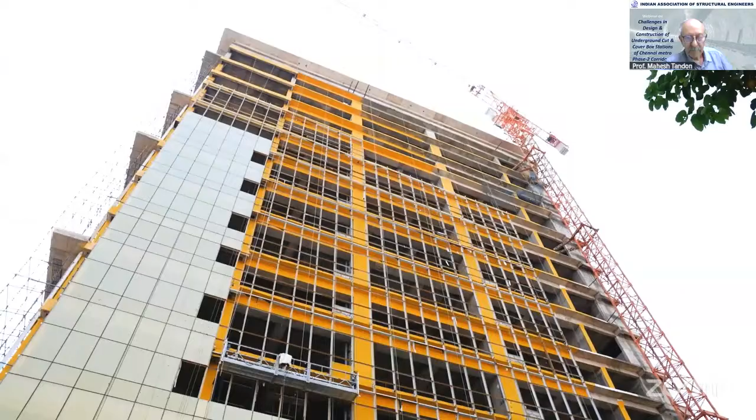The Indian Association of Structural Engineers, also known as IAStructE, was conceptualized and constituted in the year 2002 by a group of senior professional structural engineers from all over the country. IAStructE is registered under the Societies Registration Act 21 of 1860.

IAStructE is a national apex body of structural engineers in India with a mission to promote the structural engineering profession and cater to the professional needs of the structural fraternity. In the short span of two decades, the association has attained an eminent position in the professional field. Its membership is valued very highly in the profession.

Since inception, IAStructE has been led by eminent structural engineers like late Shri Mahendra Raj, late Shri Kumar Ghosh, Shri Subhash Chand Mehrotra, Professor Mahesh Tandon, Shri Alok Bhaumik, Shri Manoj Mittal, and Professor R. Pradeep Kumar as its president.

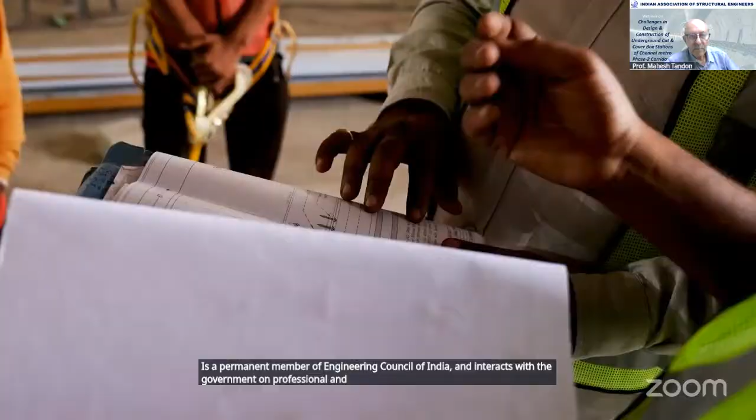IAStructE is a permanent member of the Engineering Council of India and interacts with the government on professional and policy matters related to civil and structural engineers. To expand its reach, IAStructE has collaborations with various international professional like-minded associations and institutions.

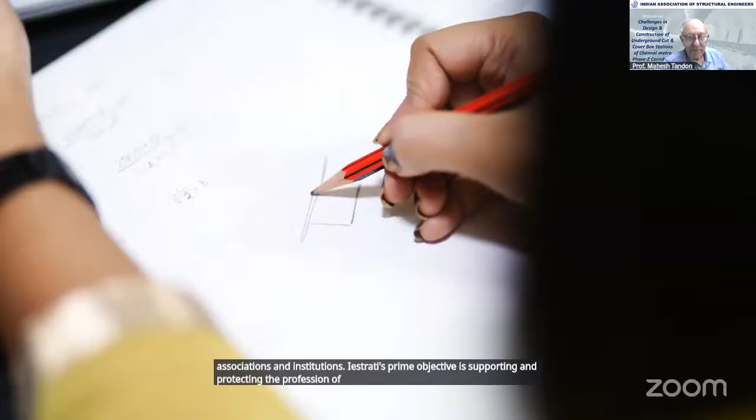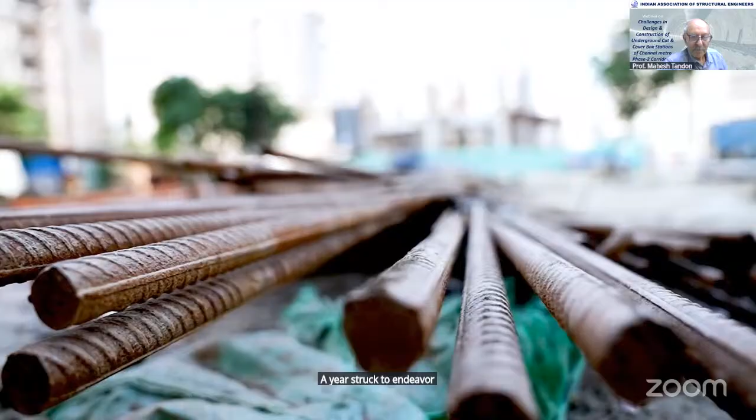IAStructE's prime objective is supporting and protecting the profession of structural engineering by upholding professional standards and acting as a mouthpiece for structural engineers in India. IAStructE endeavors to ensure that its members develop the necessary skills in structural engineering and work to the highest standards by maintaining a commitment to professional ethics and standards.

IAStructE is actively engaged in organizing several continuing professional development (CPD) courses for structural engineers to help them update their knowledge and advance their career paths. It also conducts refresher courses for young and practicing engineers and student-oriented programs.

Seminars, workshops, conferences, technical lectures and discussions related to the latest technological advancements and case studies are also organized regularly for members, enabling them to continuously update their knowledge and skill set by interacting with the best minds from the industry. IAStructE's activities are widely appreciated and known for quality technical content.

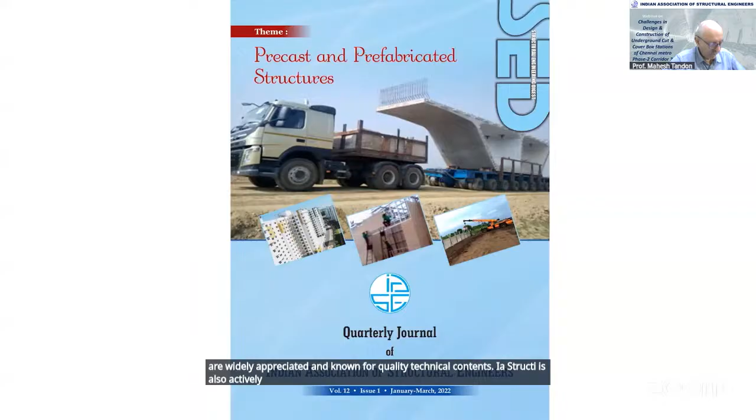IAStructE is also actively engaged in publishing its quarterly journal Structural Engineering Digest (SED), code commentaries, professional guidelines, and a monthly newsletter. IAStructE's publications are becoming popular with time.

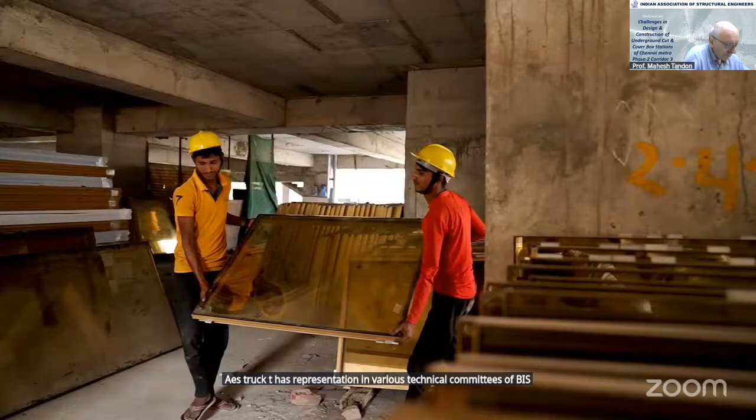IAStructE has representation in various technical committees of BIS and IRC as well. Its members are actively contributing to National Code Formulations.

In the year 2020, IAStructE started a National Awards competition to stimulate interest in the structural engineering field and to promote innovative thinking and creativity. The awards are presented to winners in recognition of their outstanding contribution to structural engineering in categories which include Outstanding Structure, Outstanding Structural Engineer, Outstanding Woman Structural Engineer, Promising Young Structural Engineer, and Best Master's Thesis in Structural Engineering.

IAStructE is currently operating from four regional centers, namely Eastern, Western, Northern, and Southern, with its headquarters in Delhi, to inculcate professional culture and provide handholding to budding engineers. IAStructE also has student chapters in several leading engineering institutions.

Membership of IAStructE is open to all civil and structural engineers engaged in the structural engineering profession. Members are elected based on their qualifications and experience in different grades as per eligibility requirements prescribed in the bylaws. Each application is carefully scrutinized before electing members.

More information about IAStructE is available on its website, www.iastructe.co.in.

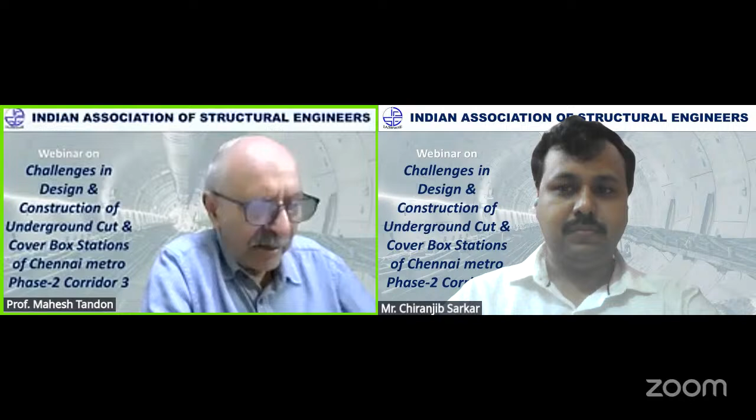He is postgraduate, with experience and planning for railway, road, and bridge projects, contributing to major tunnel works.

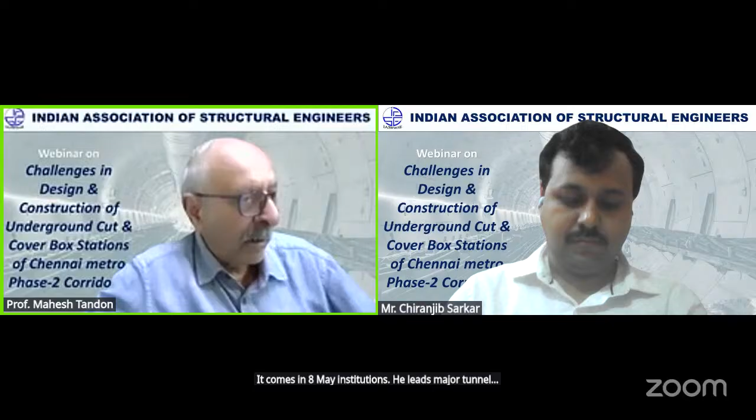Tandon sir, there is some weak internet connection from your side. Your voice is not audible properly. Wi-Fi connection, let me change it.

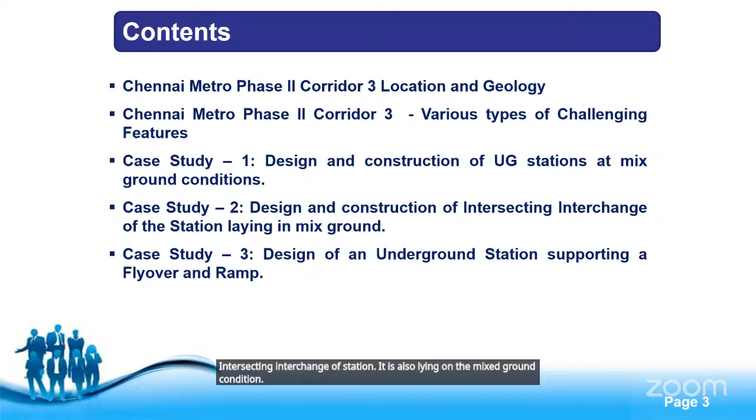In my today's presentation, I will discuss three major challenges as three case studies. The first case study is on the design and construction of an underground station at mixed ground condition. The second case study is the design and construction of an intersecting interchange station, also lying on mixed ground condition. And the third case study will be on the design of an underground station supporting a flyover and ramp.

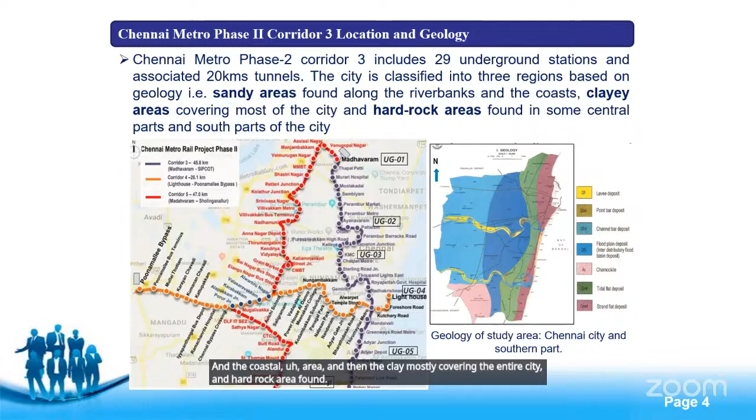Regarding the geology of Chennai city, the entire city is classified into 3 region-based geologies: sandy areas found along the river banks and coastal areas, clay mostly covering the entire city, and hard rock areas found in some central and southern parts of the city.

Chennai Metro Phase 2 Corridor 3 contains various types of challenging features. The first is an underground station at mixed ground condition, meaning half of the station is seated in soil and half of the station is seated in rock. This is called a mixed ground condition.

Then there's an intersecting interchange station also lying in mixed ground condition. It is an intersection of 2 lines, Corridor 3 and Corridor 4, and this station is also situated in a mixed ground condition.

The third one is the flyover - one flyover runs above the entire length of the station. The fourth is an underground station having cross passages, a crossover station, and 2-level parking.

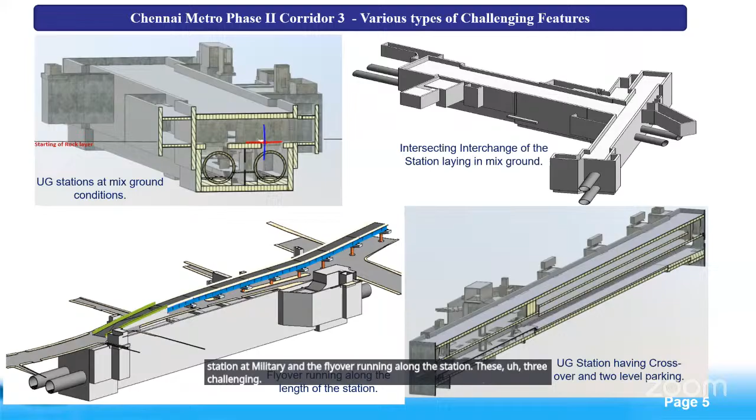Out of these challenging features, today I will discuss the first three: the UG station at mixed ground condition, the intersecting interchange station at mixed ground condition, and the flyover running along the station. These three challenging features we will discuss during our session.

Design and construction of Thiruvanmiyur underground station of Chennai Metro Phase 2 Corridor 3 has been chosen here as a project-specific case study. Thiruvanmiyur UG station belongs to contract package UG 5. This is the purple line alignment I have shared for Phase 2 Corridor 3, and this is the Thiruvanmiyur station chosen as the project-specific case study.

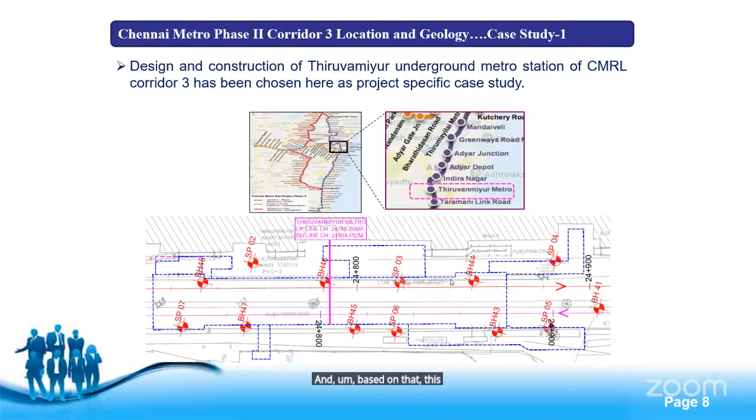This slide shows the borehole locations marked into the station box, and based on that, this geotechnical long profile has been plotted. Further, the station box has been superimposed onto the geotechnical long profile.

You can see this is the rock line diagram, and this is the tunnel line. You can see that half of the station is situated in the soil - above the rock line diagram - and half of the station is situated in the rock, below the rock line diagram.

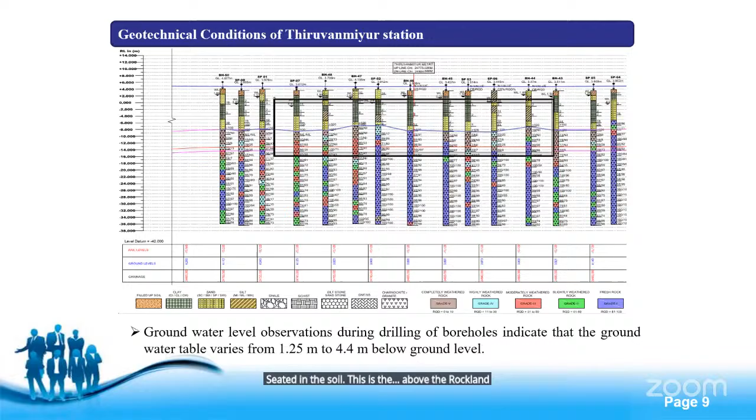As part of the station description, this slide shows the station geometry of Thiruvanmiyur UG metro station. Length of the station is 152 meters, height is 16.5 meters, width of the station at the middle is 20.25 meters and 20.35 meters, and at the end, the shaft area - launching shaft, retrieval shaft - it is 24.05 meters.

As I already mentioned in the previous slide, half of the station is situated in soil and half is situated in rock. Due to the difficulty in digging in the hard strata, that is the rock strata, as well as due to the self-standing nature of the rock, a dual approach is proposed here.

You can see the section, the D-wall is proposed to be terminated above the base level. This is the roof slab, this is the intermediate slab. In the metro we generally call it the concourse slab, and this is the bottom slab, the base slab.

Generally we have the D-wall below the base level, having some embedment of 4 to 5 meters below the base level. But here, due to the presence of the rock level, we have difficulty in grabbing and the tensioning of the diaphragm wall.

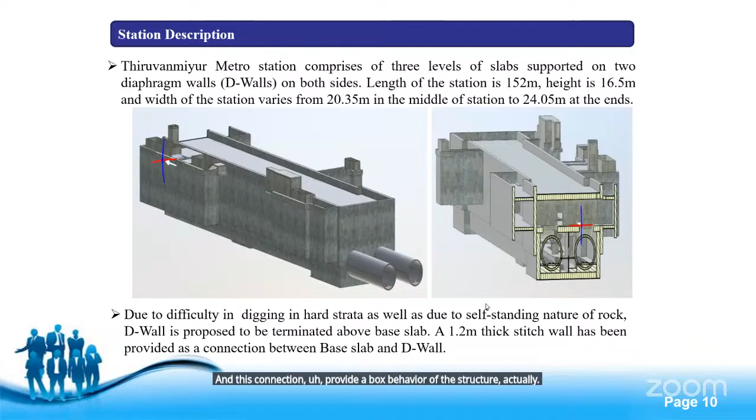Now due to the varying rock layer along the station alignment, three cases have been adopted as part of the project specific case study models. The first one is case one. If we found the rock level, there are three probable cases that may arise.

The first one is if the rock layer is found at around the base level, then we have to terminate the diaphragm wall around 3 meters below the base level. This is our typical station arrangement generally, the typical arrangement we do with the D-wall.

Then in case 2A, if the rock layer is found more than 3 meters below the concourse level, that is called case 2A. And if the rock layer is found within 3 meters below the concourse slab, that is a different case.

So we don't actually know the starting level of the rock along the station line. So three probable cases may arise. If the rock layer is found below the base level, there should not be an issue because we will have good embedment in the diaphragm wall. But these three probable cases, course conditions may arise.

The first one is if the rock layer is found at the level of the base level, that is case one. In case 2, if the rock level is found within 3 meters below the concourse level, and if the rock level is found more than 3 meters below the concourse level, those are the other cases. So our toe pin, basically this shear pin, the toe pin is required for both case 2A and 2B.

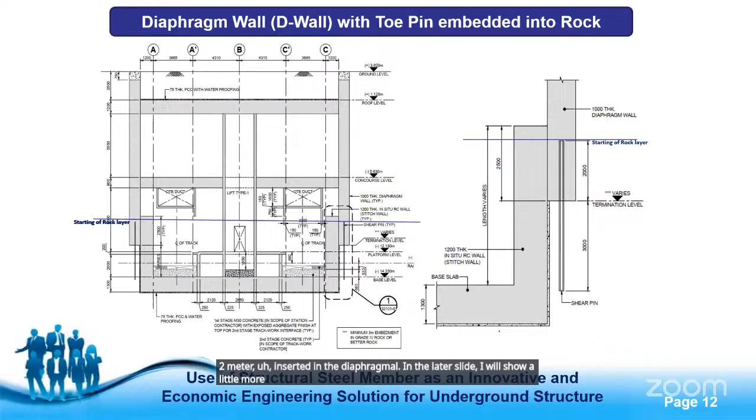Here you can see it's a 5-meter D-wall panel. 3 shear pins have been put into the 5-meter D-wall panel. This is a small portion view I have shared here. It's an elevational view actually, and you can see 3 shear pins.

Here you can see the toe pin is embedded into the rock layer. This portion is the rock layer. So the toe pin is embedded into the rock layer to provide adequate embedment to the diaphragm wall, given the presence of this hard rock layer.

This is the D-wall in rock scheme, showing plan, elevation, and cross section. Here you can see the plan, this is the elevation, and this is the cross section.

A 250-millimeter dia pipe passes through the diaphragm wall here, and a prefabricated steel I-shaped member has been embedded into the rock layer through a drill hole. Here you can see the drilling in the rock, and this is the D-wall part, and this is the shear pin part.

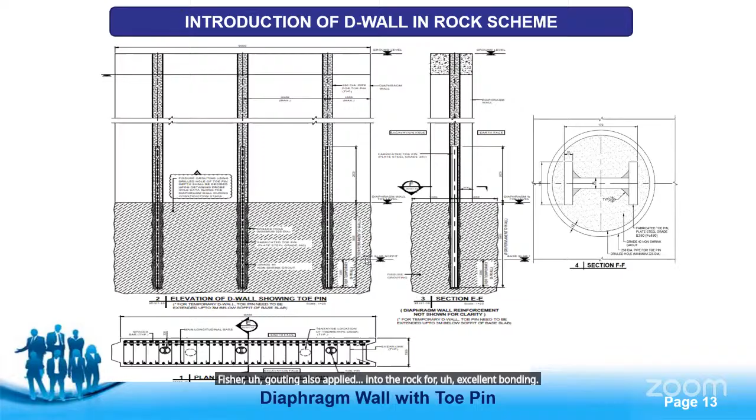Now I will come to the advantages. There is no requirement of separate time and activity for temporary earth retaining structure arrangement, as the top-down sequence of diaphragm wall has been chosen here. So there is no requirement of additional space for earth retaining structure, because we are choosing the top-down method with diaphragm wall.

There is a major saving in quantity of temporary earth retaining structure, and fastest construction with less manpower involvement in this top-down method with D-wall, and no requirement of separate traffic decking arrangement, because with the top-down construction sequence it can be managed easily.

After casting of the roof slab, traffic can be diverted above the roof slab. This is the major advantage in the top-down sequence. After casting of the roof slab, you can divert the traffic above it.

In the present case, since we are not casting the full height of the diaphragm wall, there is a reduction in the D-wall embedment also. So these are the advantages, and definitely there are some limitations. The major limitation is that it requires more skill, manpower, and equipment.

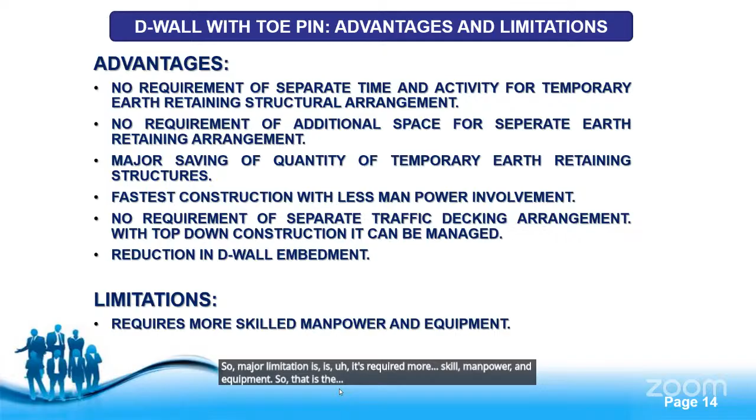As a part of the construction stage analysis, the entire construction stage analysis is done in Plaxis software. The toe pin is assigned into the model as a spring stiffness equivalent to its member property. Here you can see the initial stage, D-wall installation stage, excavation stage, entrance excavation stage, backfilling stage, and the service stage. So different stages of the sequence have been shown here.

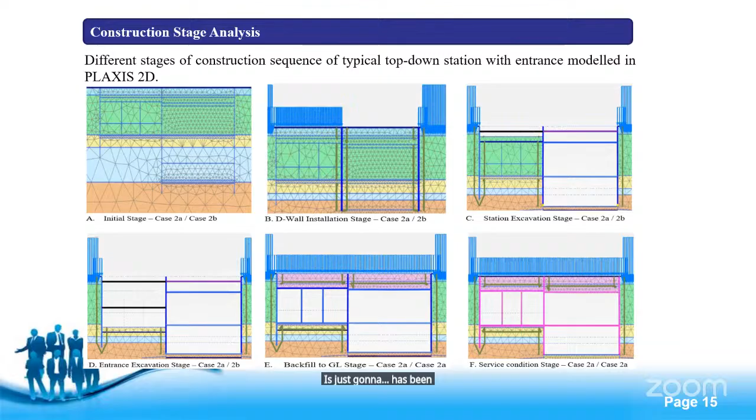As a part of the service stage analysis, the entire service stage analysis is done in STAAD Pro software for both 2A and 2B cases. In the 2A, 2B case, there will be a stitch wall, modeled here as an enlarged section. The envelope of all cases, construction and service, has been considered for detailed RC design of the D-wall and the stitch wall.

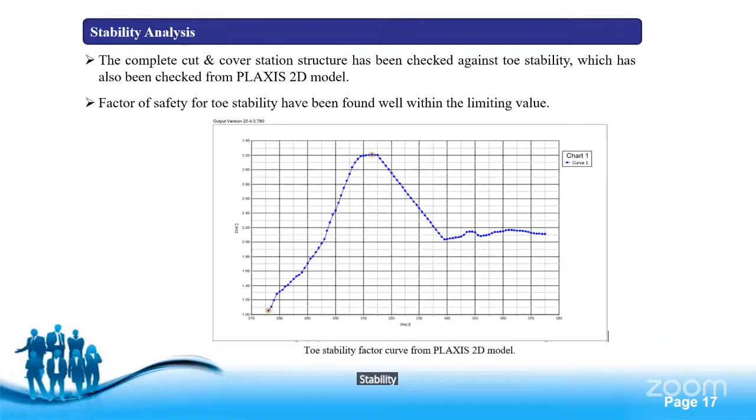This is the stability analysis. Now, as a part of the stability analysis, the entire station box has been checked against toe stability in Plaxis 2D software. Factor of safety for toe stability has been found within permissible limits, as you can see from the stability curve shown here. Ground stability has also been ensured by checking ground surface settlement with respect to its limiting value. Horizontal deflection of the diaphragm wall has also been checked for different stages of excavation and found within permissible limits.

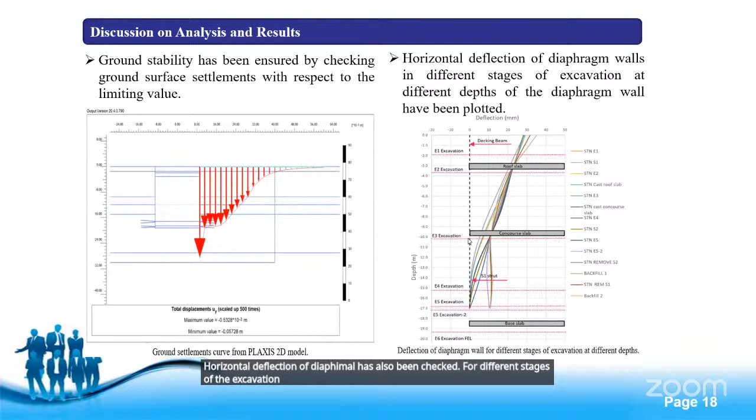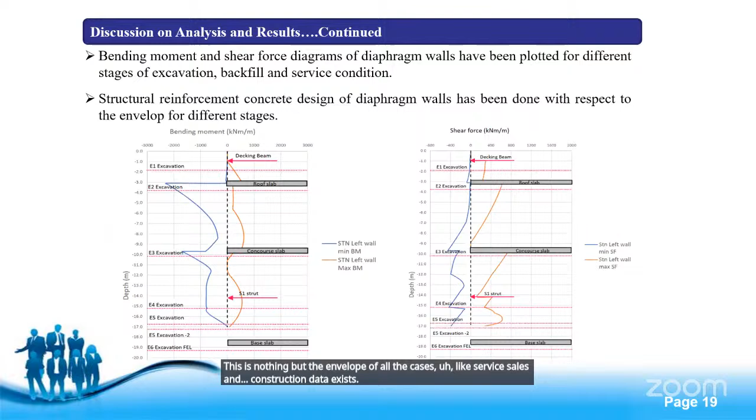Steel structural design check for the toe pin has been done as per IS 800:2007 code. For the shear pin, steel design check has also been done.

Now I will quickly discuss the conclusion part of project specific case study one. First, unconventional and innovative technical solutions have many times saved the project from long standstill. As I mentioned, due to the presence of a hard rock layer, our trenching and grabbing of the D-wall was stuck up, so an unconventional and innovative technical solution was adopted. The structural design of the Thiruvanmiyur station, which falls in the mixed ground condition of Chennai Metro Phase 2 Corridor 3, has been referred here.

Due to difficulty in excavating the hard rock strata, the arrangement of a shallow diaphragm wall, terminated above the base level, with a shear pin and toe pin embedded into the rock strata along with a stitch wall, has been adopted as shown in previous slides. This arrangement basically reduces the requirement of any kind of temporary earth retaining structure like soldier pile, secant pile, etc.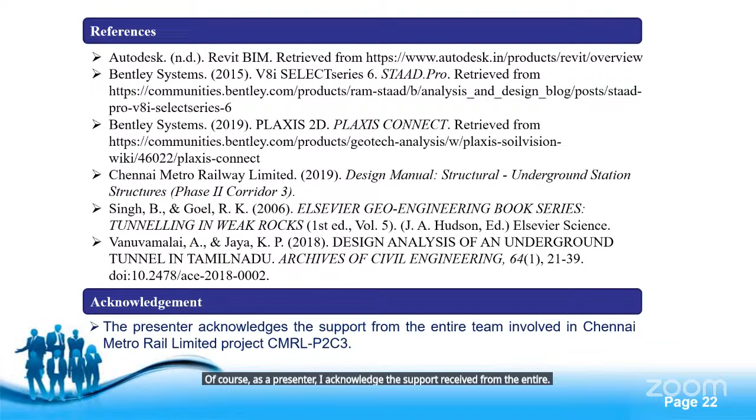Just for information, this paper was published in IGC 2021, and it got the award for best paper at that IGC 2021. So this case study was already published.

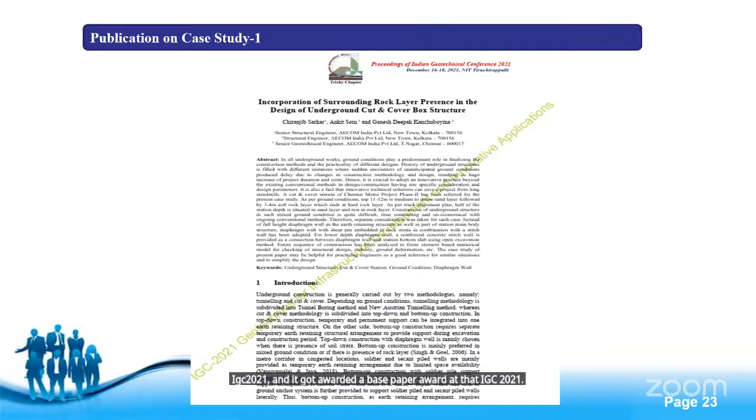Now I will quickly move to case study two.

Sir, am I audible properly? Yeah, yes. No issue. Is there any difficulty in my presentation or audio? No, please go ahead, Chiranjib.

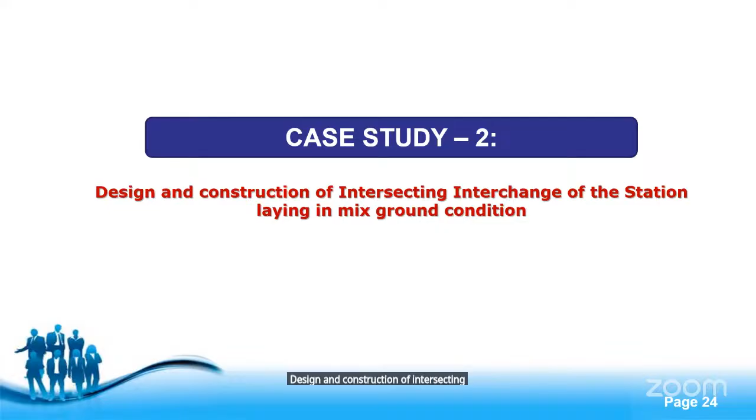Okay sir, so now I will move to the second challenging feature, that is the design and construction of an intersecting interchange station lying on mixed ground condition. These are some salient features of case study presentation two.

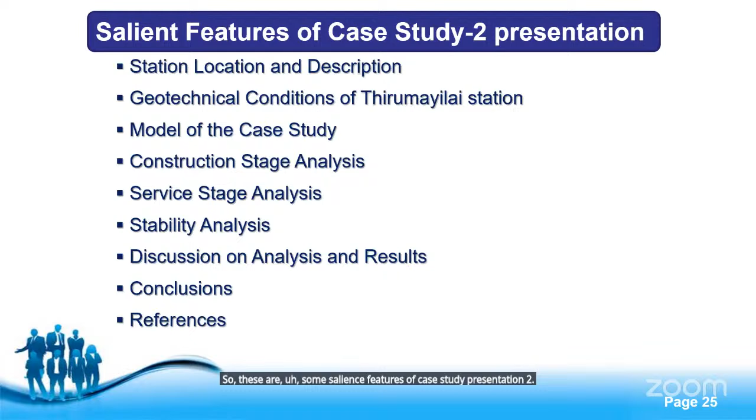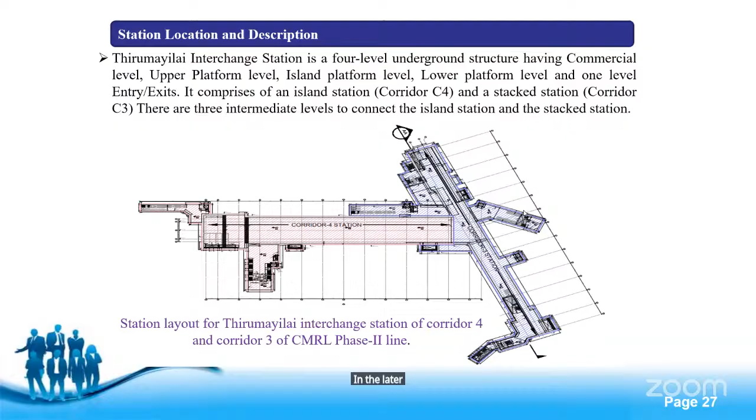Here you can see the width of the station is quite narrow because of land and other issues. There is no adequate land available, and there are some site constraints also. So the station was proposed as a narrow width. Therefore, it happened as a stacking of upline and downline, not two lines in parallel. It's a stacking of upline and downline, and the island part of the tunnel is going in between the upline and downline.

So here you can see a three dimensional view of the entire station box of Thirumayilai station along with the intersecting area. This is the intersecting area.

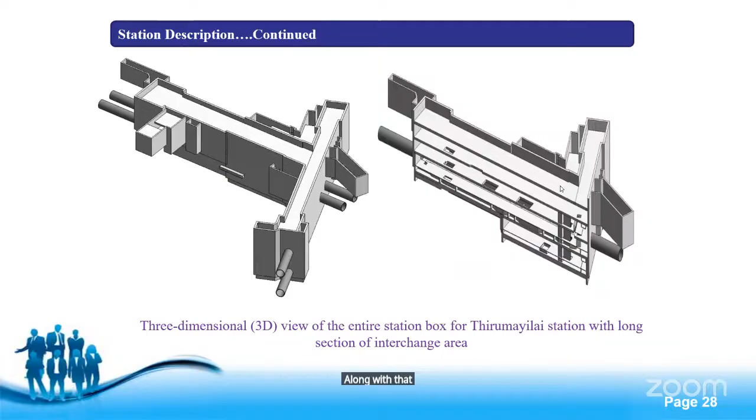Now cross section of corridor 3 station. On the left hand side you can see cross section of corridor 3 and the interchange area. Cross section of corridor 3. Here on the left hand side, and on the right hand side you can see the cross section of the intersection area.

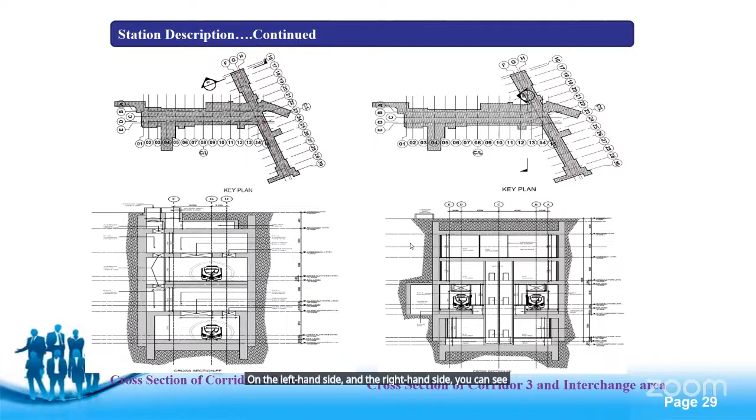So you can see here that the corridor 4 track is placed in the island between the upline and downline. This is in the plan you can see the cross section. This cross section is from the stacking part of the station. You can see this is the upline, this is the downline, and it is the island part of the station. Now I have cut a cross section from this intersection area. In this intersection area you can find that this tunnel, meaning the island part of the tunnel, is passing in between the upline and the downline, in between the stacking of upline and downline.

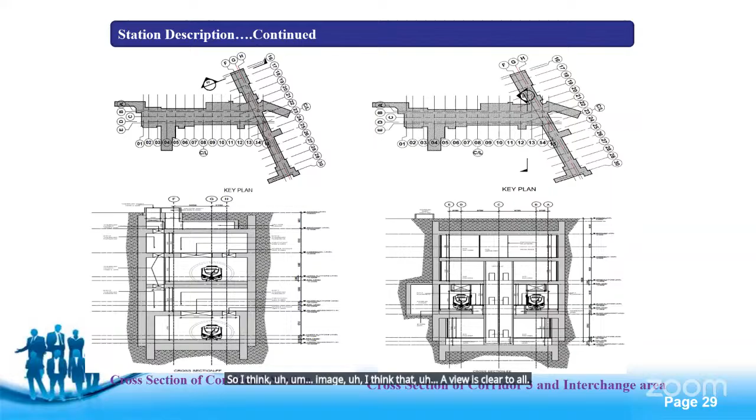So I think the image view is clear to all. And you can see, as I told earlier, that the

geological condition of Chennai city is mostly clay. Sand area is found along the river bank and coastal area, and hard rock is found in most of the central and south part of the city. So for Thirumayilai station, subsurface stratum at the site mostly consists of cohesionless soil, and you can see here loose sand, medium sand, dense sand - all these are the cohesionless soil, which is further followed by weathered rock.

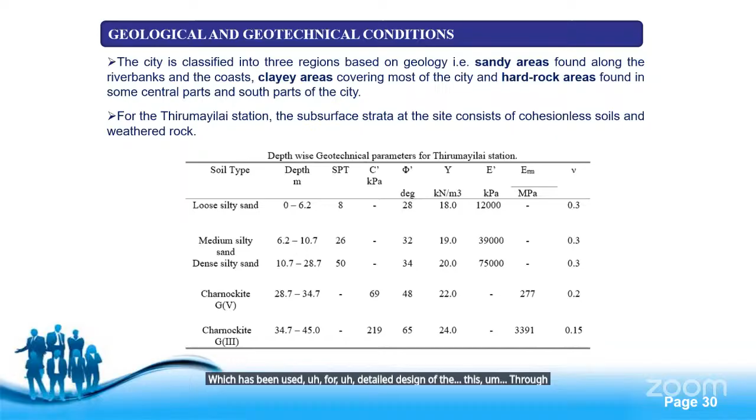The current slide shows the depth-wise geotechnical parameters which have been used for detailed design of this Thirumayilai station. Further, the station box has been superimposed into the geotechnical long profile. You can see here this is the station box of the island part of the station, that is the corridor 4 part of the station. And this is the geotechnical profile long sectional with the superimposed station box for the stacked part of the station. You can see here also that half of the station is situated in rock and half of the station is situated in soil.

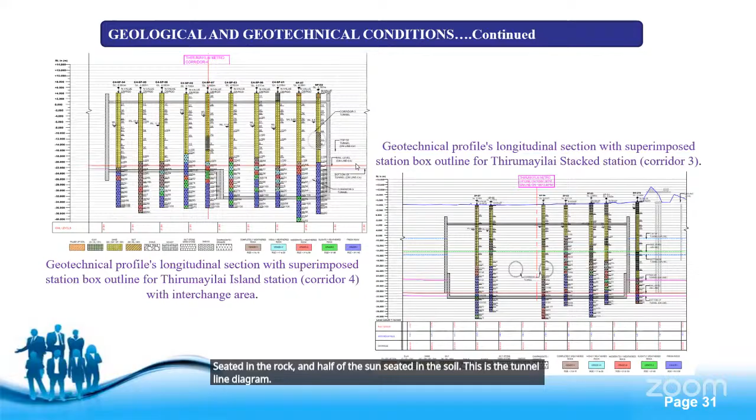This is the tunnel line diagram. Due to the varying rock layer along the station alignment, two cases have been adopted as part of the model-specific case study, that is case 1 and case 2. Now what is case 1? Case 1 is basically rock at or below the island undercroft slab level.

If we found rock at island undercroft slab level, then in that case a diaphragm wall with a typical embedment of 3 meters is used if we found grade 4 rock, and if we found rock like grade 5, then there will be an embedment requirement of 5 meters. So typical case 1 is basically applicable here. You can see this island part of the station relatively has the lesser depth because it's in the island part, and the stacking part of the station relatively has more higher depth, with more area in the rock zone.

So most part of the island part of the station, that is the corridor 4 part of the station, has case 1 condition, that is the rock mostly found below the undercroft level, having an embedment of 3 meters for grade 4 and above rock, and 5 meter embedment for grade 5 case rock.

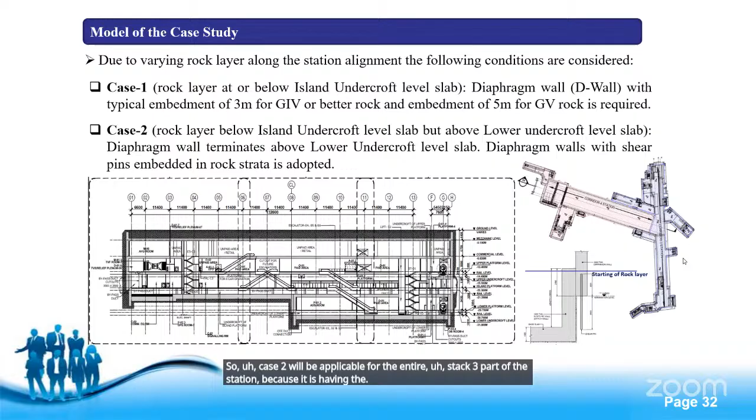Now the current slide shows the cross section with case 2 condition. Here you can see that the toe pin and shear pin have been provided, and there is some rock bolting and other provisions. Unlike the previous slide, here the D wall does not have embedment below the bottom slab. You can see the D wall is terminated above the bottom slab, and definitely some toe pin is required.

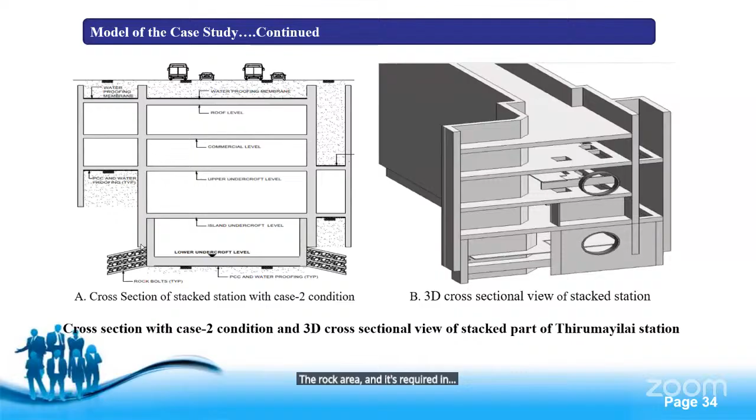So this portion is required here, unlike the previous slide. In typical case 1, you can see only roof slab, commercial slab, upper undercroft slab, and the island undercroft slab - only 4 levels of slab. In the present case, there are a total of 5 levels: roof, commercial, upper undercroft, island undercroft, and lower undercroft. This is because this is the intersection area - stacking of the up line, stacking of the down line, and the island part of the station. So this narrow stacking part of the station, having relatively higher depth and more embedment into the rock area, requires this dual toe pin system.

The current slide shows different stages of construction sequence of a typical top-down construction for both case 1 and case 2 conditions, modeled in Plaxis 2D software. This slide shows the different construction sequence for the island part of the station, parallel to corridor 4, which has the typical case 1 condition - meaning the D wall has adequate embedment. These are the different stages of construction sequence modeled in the finite element software: initial stage, D wall installation, entrance excavation stage, and backfilling stage. This is the construction sequence for the island part of the station with case 1 condition, meaning the D wall has embedment.

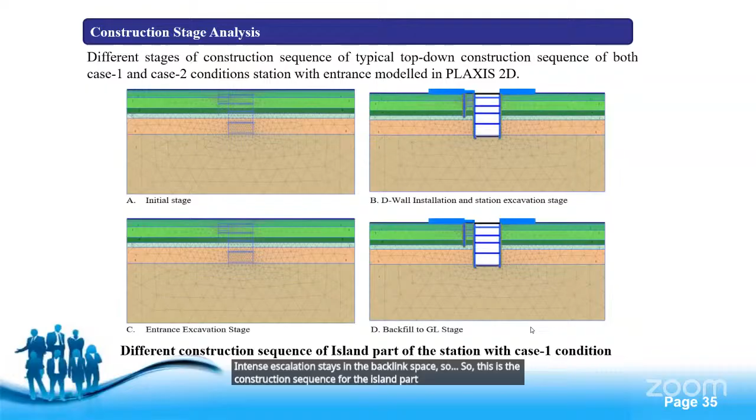Now the current slide shows the different construction sequence of the narrow stack part of the station with case 2 condition. Case 2 condition means there would be a dual toe pin system. The toe pin is assigned into the model as a spring stiffness equivalent to its member property. These are the different stages of the construction sequence for the narrow stack part of the station with case 2 condition.

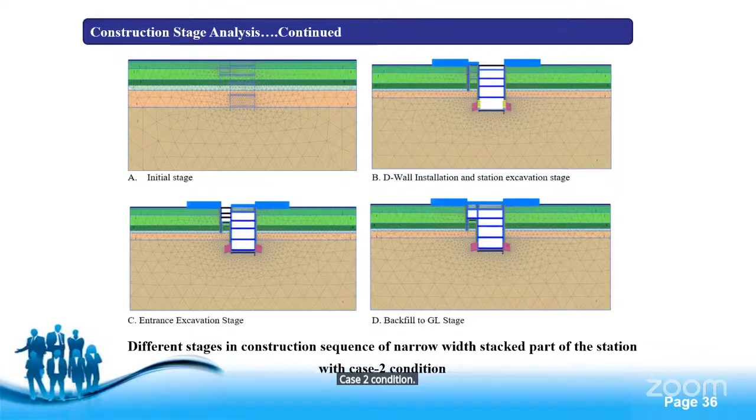As part of the service stage analysis, the entire service stage analysis is done in Staad software - case 1 for the island part of the station along corridor 4, and case 2 for the stack part of the station, parallel to corridor 3. The stitch wall is modeled as an enlarged section, and the envelope of all these cases has been considered in the RC design of the D wall and the stitch wall.

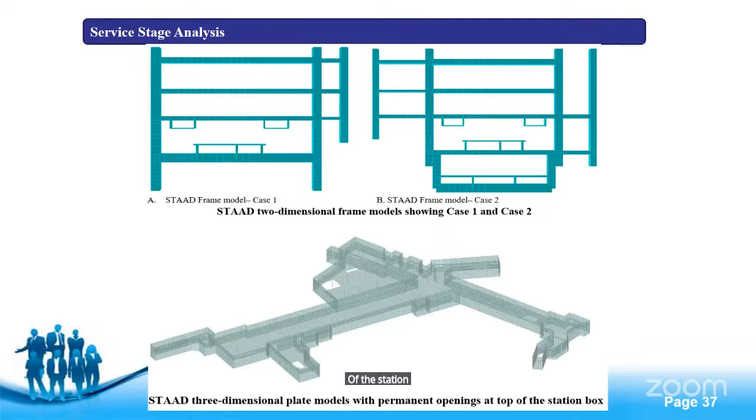All different levels of the slab have been checked by developing a 3-dimensional plate model with permanent opening, subject to the full service condition load under ultimate and serviceability limit conditions. You can see here the 3-dimensional STAAD model with the opening at the top of the station box. These are the analysis parts - construction stage and service analysis.

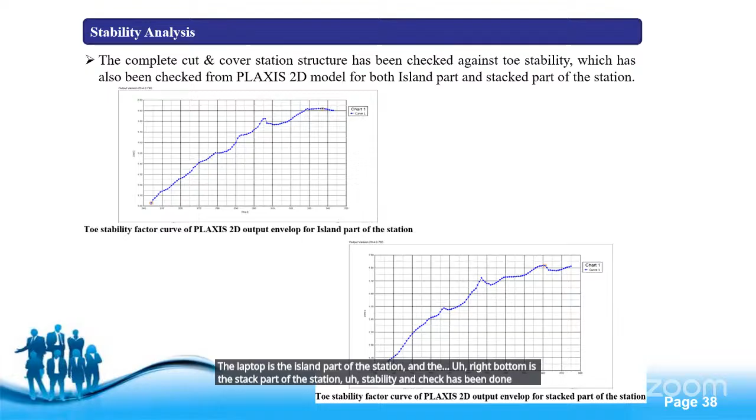As a result, stability analysis was also performed. Stability of the entire structure has been checked against toe stability in Plaxis 2D software, for both the island part and the stack part of the station. The left top shows the island part of the station analysis, and the right bottom shows the stack part of the station stability analysis. Both cases were found within permissible limits.

And definitely ground stability and ground analysis also checked for the entire excavation, and construction has been performed in Plaxis 2D software for both the stack part and the island part of the station.

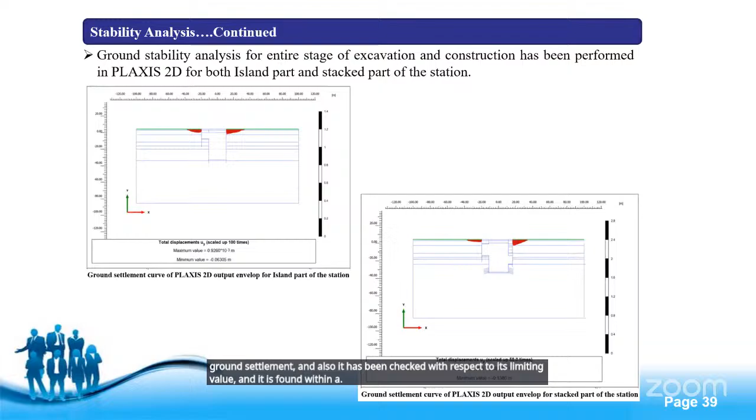As an outcome of the different series of model analysis, both for the island part and the stack part of the station, deformation and then bending moment behavior of the diaphragm has been studied in detail.

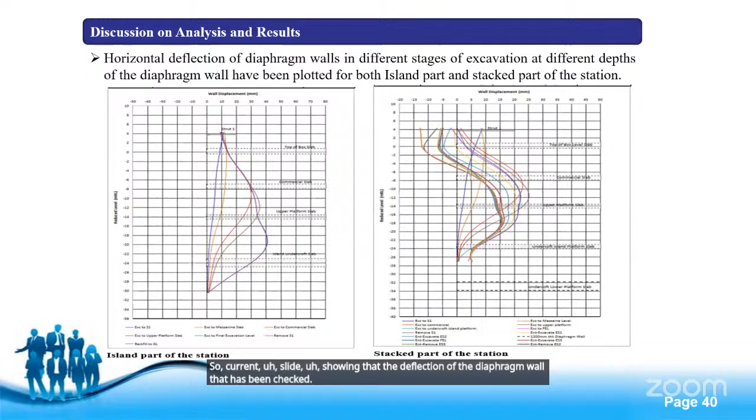So this slide shows the deflection of the diaphragm wall checked with respect to its different stages of excavation and construction, for both the island part on the left hand side and the stack part on the right hand side. This is the horizontal deflection of the diaphragm wall checked for different stages of excavation, and it has been found within a permissible limit.

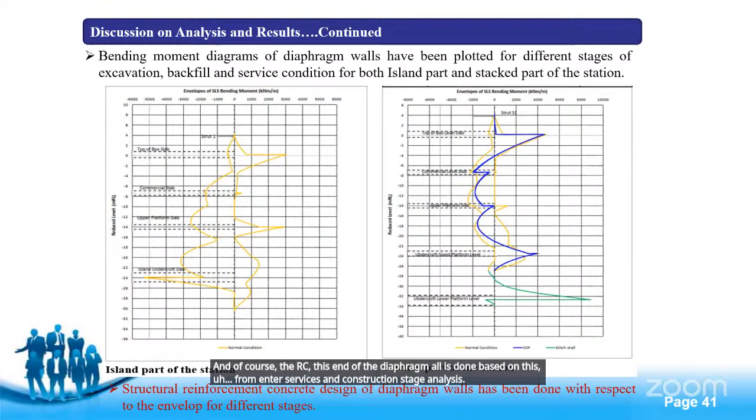For different stages of excavation, backfill, and service condition. The RC design of the diaphragm wall is done based on this bending moment diagram envelope from the entire service stage and construction stage analysis. And again, the design of the toe pin, that is the shear pin, has been checked with respect to the criteria of IS 800.

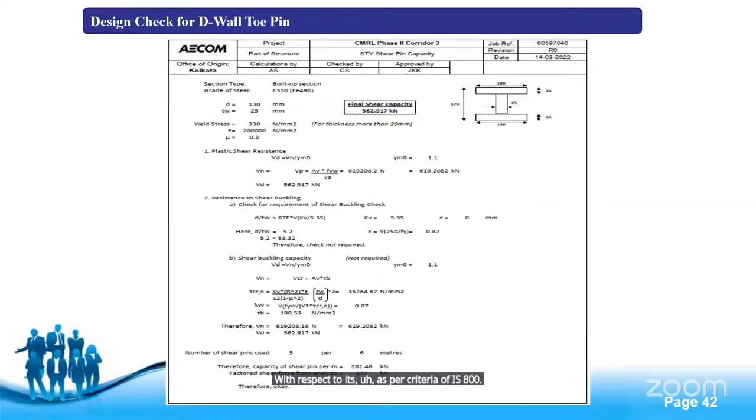Now I will just quickly discuss the conclusion part of the project specific case study 2.

Due to site constraint and land issues, Corridor 3 part of the station is adopted as a narrow width stack station. As I already mentioned, we couldn't get the adequate width of the station, which is generally 20 meter or 24 meter. There was no adequate width available for the entire length of the station, which is why it has been planned as a narrow width stack station.

So therefore, Corridor 3 station has been proposed as a narrow width stack station. Therefore, the Corridor 4 part of the station is proposed as an island station between the stacking of the up line and down line, with an interchange connection area.

As part of an economical approach of design and construction, Thirumayilai underground station has been proposed with a top-down method to get the advantage of the diaphragm wall as well as faster construction, less manpower and equipment. Due to the encounter of the hard rock layer, a shallow depth diaphragm wall with the toe pin in between the rock strata system has been adopted here, and a stitch wall has been provided as a connection between the D wall and the base slab.

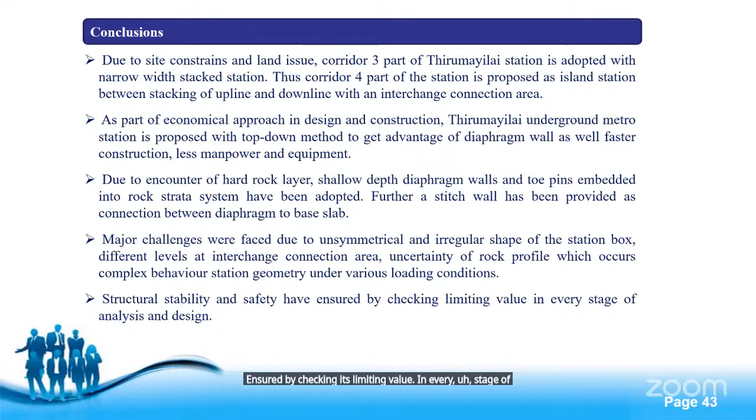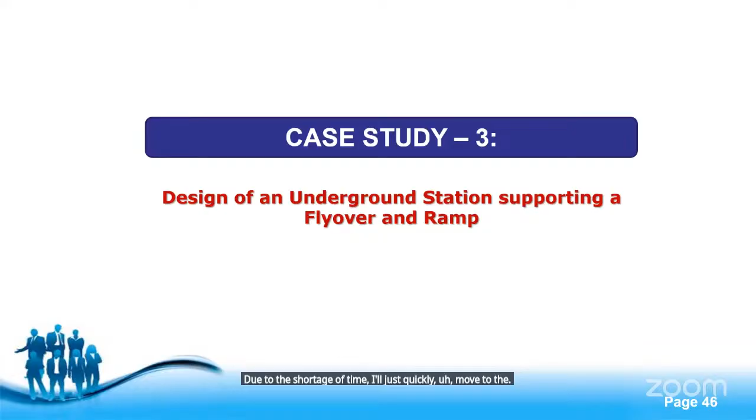Now, due to the shortage of time, I think I have a few minutes left. I will quickly move to the third case study, that is the design of an underground station supporting the entire flyover and ramp.

To provide a multi-dimensional transportation system for a busy road crossing at Radhakrishna Salai junction, this junction of Chennai city has a highway flyover planned above the underground metro corridor.

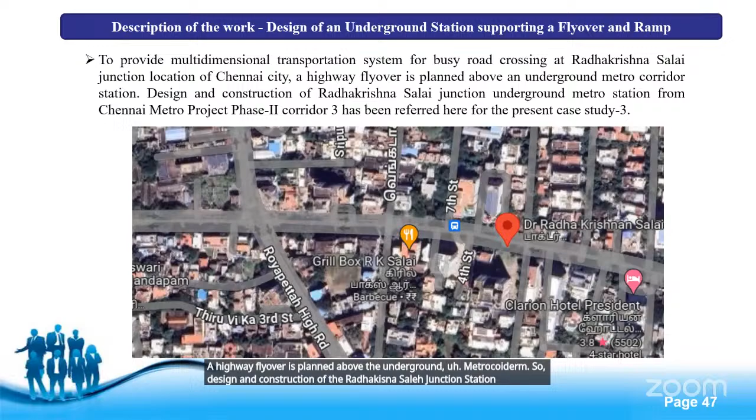The design and construction of the Radhakrishna Salai junction station is referred here as project specific case study 3. The station comprises 3 levels of slab supported by 2 diaphragm walls. This is a typical top-down station: roof slab, intermediate concourse slab, and bottom slab, supported by the diaphragm wall acting as an external wall, forming the station's internal framing.

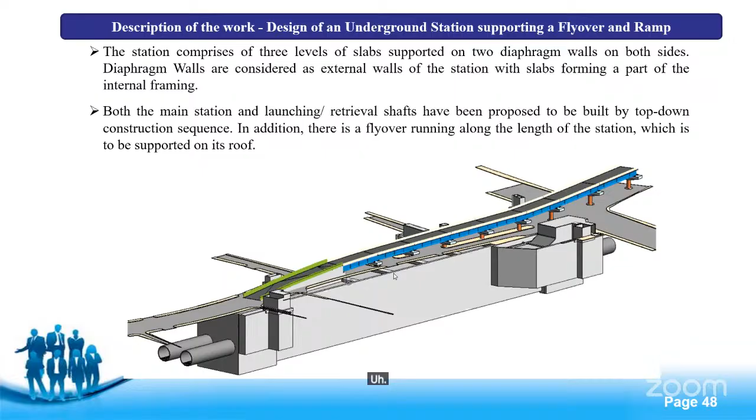Both the main station part and the launching or retrieval shaft have been proposed to be built by the top-down sequence. In addition, there is a flyover running along the length of the station, supported on the roof slab. The roof slab behaves like a foundation for the flyover.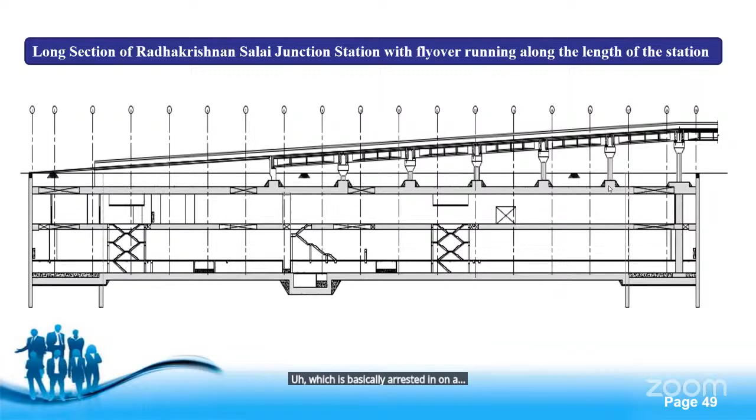This is the long sectional view of the Radhakrishna Salai junction station with the flyover running along the station length, showing the flyover pier system and precast girders. The flyover pier is supported on the roof slab, which rests on a cross beam system, discussed in more detail later. There is also a ramp part shown.

This is a 3D isometric view of the Radhakrishna Salai station running along the length of the station, along with the long sectional view and a 3D long sectional view.

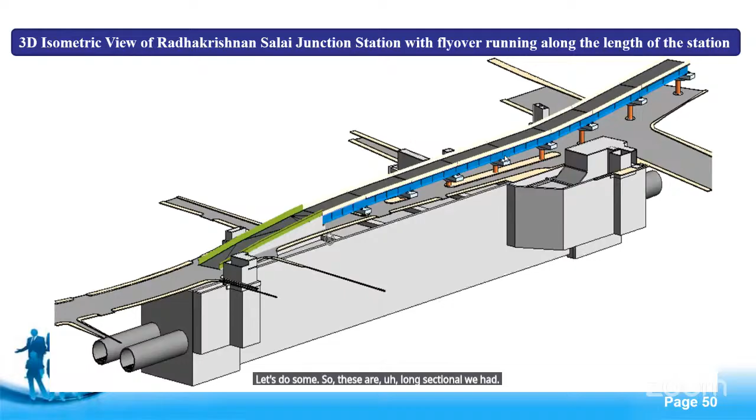You can see the roof slab, intermediate slab, and concourse slab. This is the ticketing area, and this is the base slab and the platform area.

The flyover is supported on the roof slab with the help of a cross beam, which also supports into the diaphragm wall. This is the 3D cross sectional view.

One view is through the pier location, and another is at the end of the station location, at the ramp location.

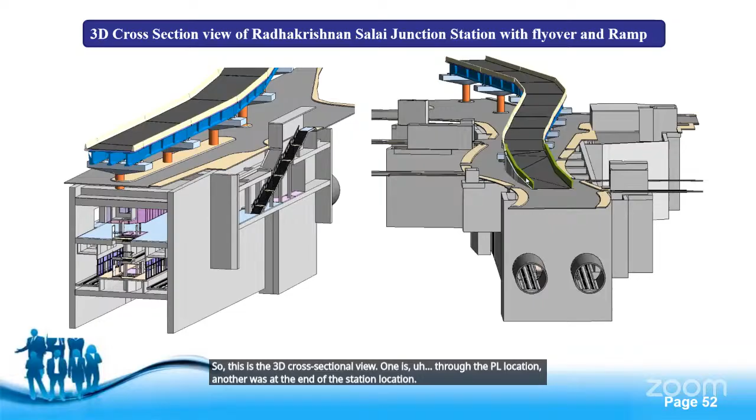As part of the design of the flyover supporting system, the structural design considers critical forces from different construction analyses. The entire design has been done in two parts: critical forces from the construction analysis obtained from soil structure interaction using finite element software.

The typical flyover span is 20 meters long, with the pier supported on the roof slab with the help of a cross beam 3 meters wide and 2.4 meters deep, which in turn transfers support into the 1 meter thick diaphragm wall.

There is also a junction pier with a span of 35 meters and 20 meters, supporting on a 2 meter by 2 meter column which transfers support into the base level.

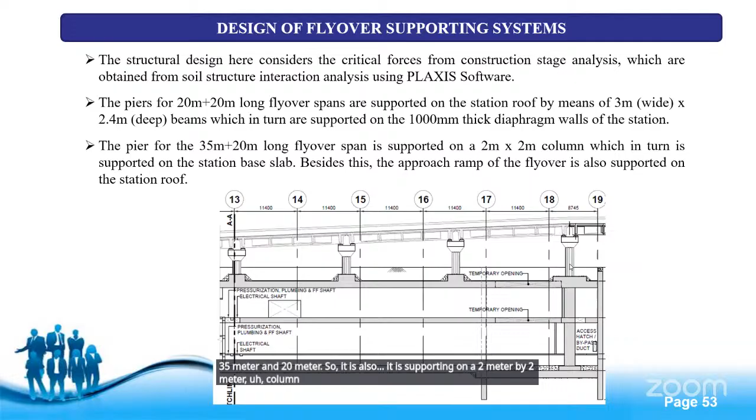In the 2D frame model with flyover load applied, these are the bending moment diagrams; one typical diagram is shown here. Based on this bending moment diagram, along with the envelope from construction stage and service analysis, the design of the structural members has been done.

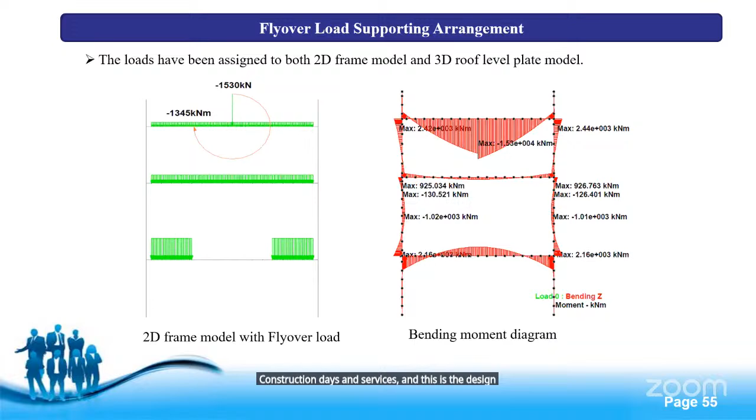In conclusion, summing up all three case studies, underground construction is gaining popularity day by day by playing a key role in improving many urban space congestion problems.

Every capital city in our country is nowadays planning for a metro, and underground construction is gaining popularity because of this space congestion problem.

To provide a multi-dimensional transportation system at a busy road crossing, Radhakrishna Salai junction, Chennai city, a highway flyover is proposed above the underground station. First the underground station will be constructed, then the flyover above it. This case study describes the design concept, optimization opportunity, and challenges of this underground station supporting the flyover and the ramp. The station comprises three levels of slab supported on two diaphragm walls on both sides.

The diaphragm wall is considered the external wall of the station, with the slab forming part of the internal framing. The entire underground station is planned with the top-down construction sequence, and the flyover and ramp are planned to be cast later, once the civil work of the underground station is completed.

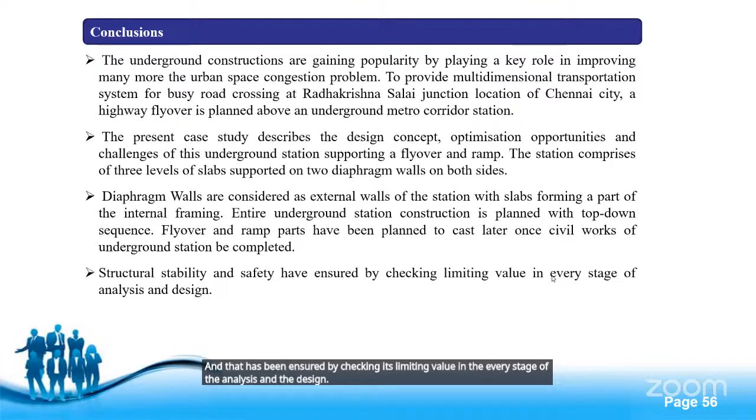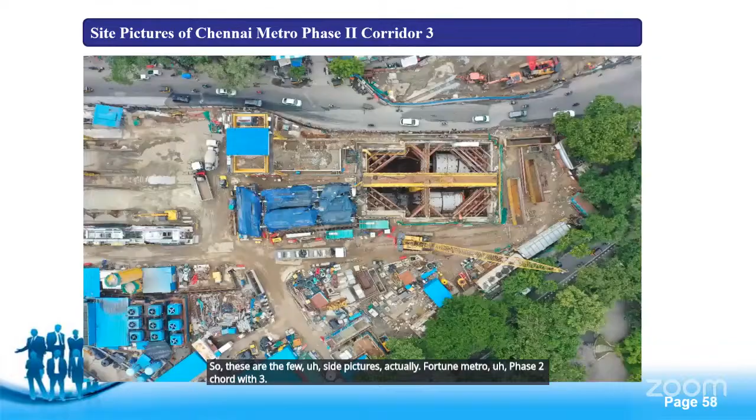These are a few site pictures from Chennai Metro Phase 2, Corridor 3. This picture is during the installation of the diaphragm wall. This is the slab at the concourse level.

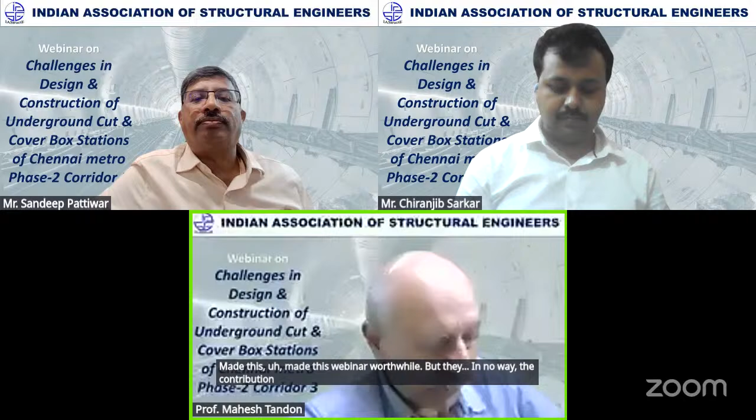Mr. Chiranjib Sarkar for a wonderful presentation, which showed the actual position in the urban environment, and gave precise answers to the questions raised. That was wonderful, and it made this webinar worthwhile. But the contribution of Mr. Pattiwar is no less, because he ably handled this question and answer session. He not only compressed the number of questions, he also left out ones where he thought we would get stuck, so we'd only be discussing one question.

That's right, that was done wonderfully. Thank you so much, and thank you to Mr. Vikas for a seamless webinar arrangement. I don't think there were many issues, except that my own thing started a little late because we had to change the Wi-Fi connection to another one. So that's all I have to say.

I don't know, but I think everybody asked, what about the presentation? Vikas, I think Chiranjib Sarkar will share the presentation with IAStructE. Once he shares it, we will share it with the participants and send it to them.

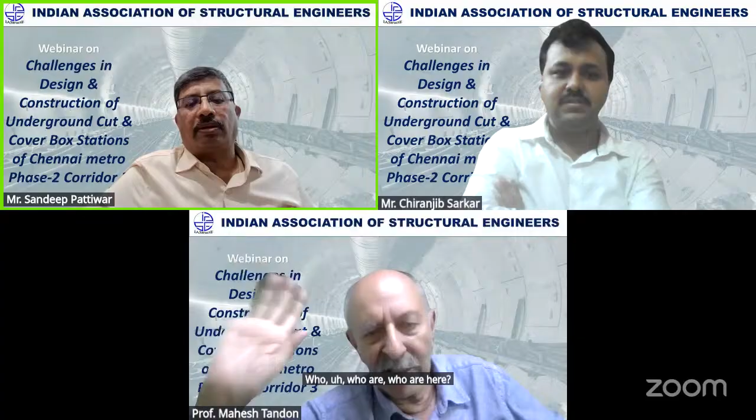So I think if you can be kind enough to just send your presentation to Vikas, he will send it to all the participants who were here. He has got all the registered addresses and everything, so that will be done. It's very generous of you to do that, because the last time I was attending one of them...

I will only remove case study 3, sir, because case study 3 has some values, and that paper was actually accepted but not yet published in a printed version, sir. So let it come, meanwhile whatever you want to share you can share. Case study 1 and 2 are already published, fine, but case study 3's printed version has not yet come.

It's officially approved, no issue. If somebody wants to see your case study 3, he should go to YouTube and see your presentation again. Yes sir, entire presentation is available on YouTube. Very true. So is that correct, Mr. Vikas? Yes sir, yes sir.

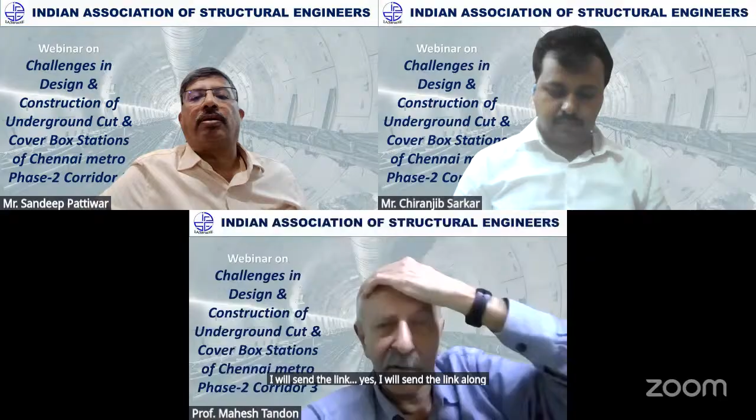So what is the YouTube URL called? Sir, it is IAStructE. YouTube subscription is there, they can go there and watch the presentation. You go to YouTube and search Indian Association of Structural Engineers. I will send the link along with the presentation and handouts to all the participants, this will be one of the presentations there.

Yes, is that right? Yes sir, yes, true, yes sir.

Okay, thank you sir, thank you for your gracious time and presence, sir. Thank you for your moderation, Tandon sir, always a pleasure. And thank you, Chiranjib. Thank you sir, it's my pleasure to share the panel with you and Master sir.

You have given an idea for Plaxis, we will certainly have their presentation also very soon. Thank you, sir. Not only Plaxis, you can have a good workshop on tunnel or underground structures. We will certainly, certainly.

So, Mr. Sarkar, before you go away, I hope that when you give the next webinar in IAStructE, we can call you Dr. Sarkar.

Sir, is that right? How much time will it take? Sir, my PhD is going on, I don't know. Actually I could not find much time because of office and work pressure. Although I have completed my coursework and term paper leading to thesis, but still for the journal and those things, it may be another 2 years, maybe I don't know, a few months, no sir, it may be 2-3 years, few months, yeah you can say 24 months.

All the best, anyway so wish you all the best, wish you all the best. Thank you sir, thank you, okay, thank you, thank you everyone, thank you. So I think with that, we are close, let's close. Yes sir.